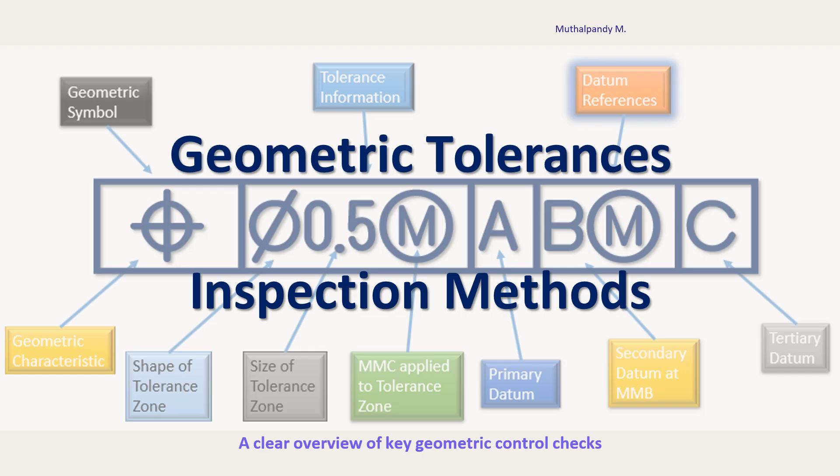Today we are going to learn about the measuring methods of geometric tolerances.

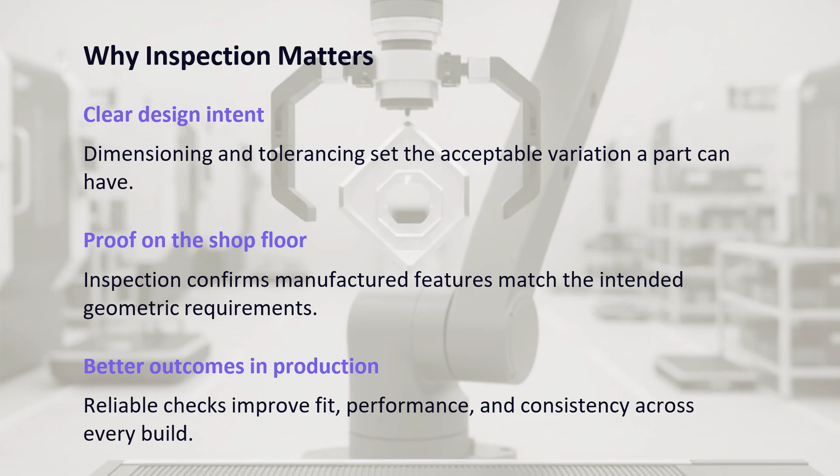Why is inspection very important? There is a clear design intent from dimension tolerancing mentioned in the drawings that sets the acceptable variation a part can have. To ensure that, we should have proof. That proof should come from inspection that confirms manufactured features match the intended geometric requirements. It improves better outcomes in production, so reliable checks improve fit, performance and consistency across every build.

The flatness variation - what do flatness checks confirm? It confirms a surface stays within a uniform, allowable flat zone. This prevents rocking, gaps, and uneven load transfer in service.

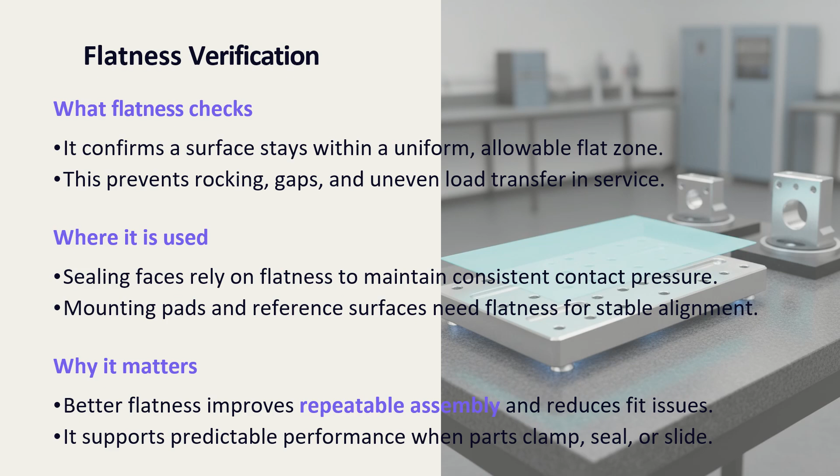Where it is used: sealing faces rely on flatness to maintain consistent contact pressure. Mounting pads and reference surfaces need flatness for stable alignment. Why it matters: better flatness improves repeatable assembly and reduces fit issues. It supports predictable performance when parts clamp, seal or slide.

Flatness inspection definition: the surface is flat within a tolerance zone consisting of two parallel planes 0.05 mm apart.

Inspection setup: place the part on a stable surface plate, representing the perfect plane. Support the part at all required points without rocking. Sweep the indicator across the entire surface. Total indicator reading (TIR) must be less than or equal to 0.05 mm.

So a flatness control frame example is given: the surface plate that is the perfect plane and tolerance zone for flatness is here, 0.05. The entire surface must lie between two parallel planes 0.05 mm apart.

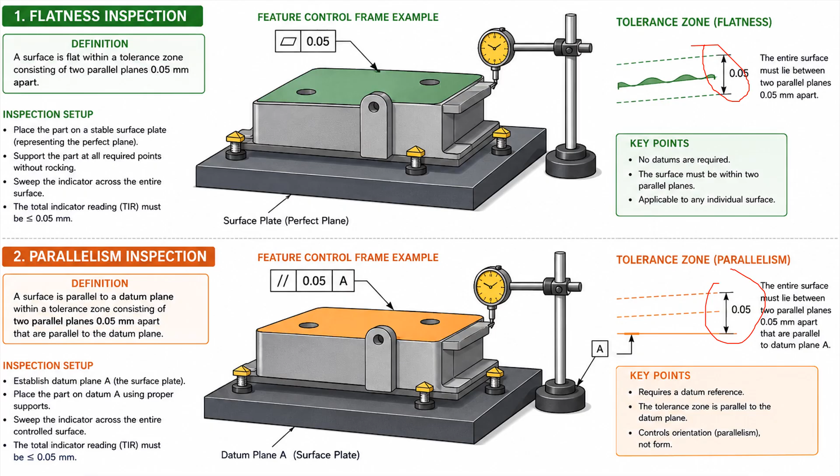Straightness check. What does straightness confirm? It verifies a line stays even without bows, waves, or local bends.

It focuses on shape along a length, not overall location. Where it is commonly applied: shafts and pins, where smooth rotation depends on a true axis; edges and guide surfaces, where sliding contact must remain stable.

Why it matters in assembly: it reduces binding, rocking, and uneven wear during rotation, motion, or seating. It improves fit and repeatability when parts must align consistently.

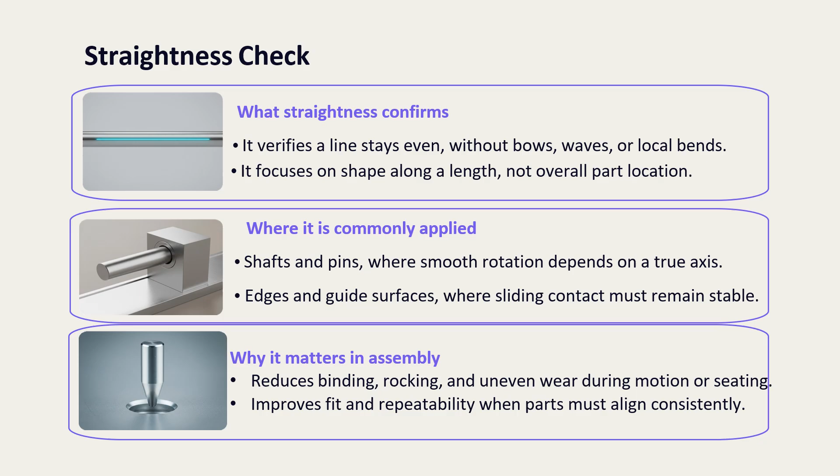Straightness inspection. The straightness definition as per ASME Y14.5: straightness is a form control that limits the variation of points along a line element or the median line of a feature so that they lie within a tolerance zone consisting of two parallel straight lines in 2D or two parallel planes in 3D. The symbol is a straight line for straightness.

The inspection setup: the part is mounted on a rotary table to allow 360-degree rotation. The dial indicator on a height gauge is set to a reference height. Rotate the table and move the gauge along the length of the part. The indicator records the variation from the straight reference line.

An example on a drawing: straightness of 0.05 mm tolerance means the median line of the cylindrical surface must lie within two parallel lines 0.05 mm apart along the entire length.

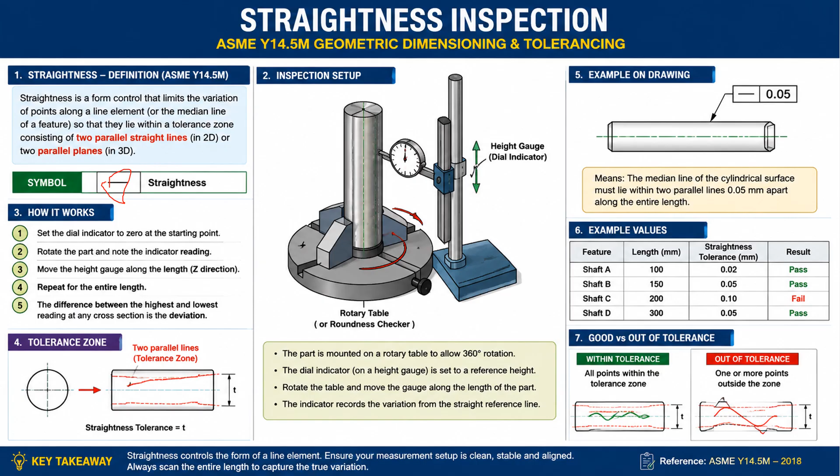And measuring circularity. What does circularity confirm? It checks how closely a feature's cross section matches a true circle. It focuses on shape quality, not the feature's location.

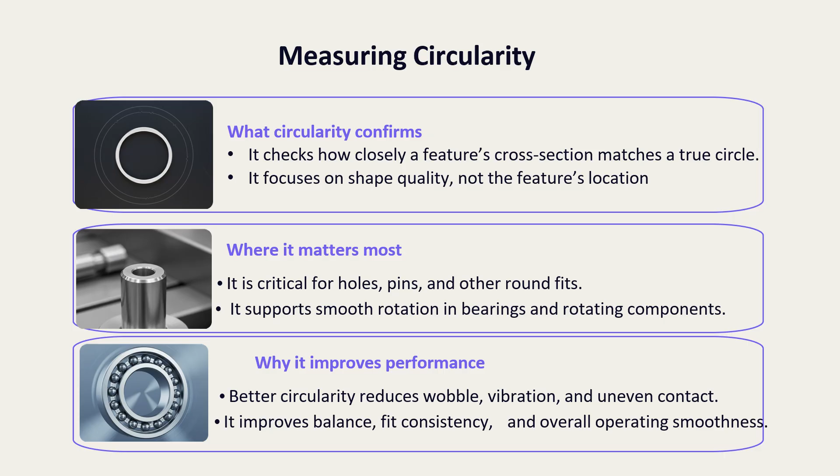Where it matters most: it is critical for holes, pins, and other round fits. It supports smooth rotation in bearings and rotating components. Why it improves performance: better circularity reduces wobble, vibration, and uneven contact. It improves balance, fit, consistency and overall operating smoothness.

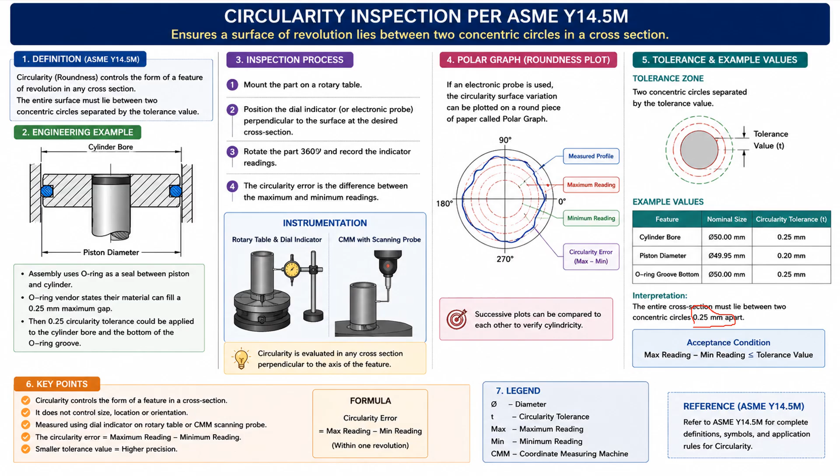Circularity versus cylindricity. Circularity is a 2D cross-section check. It confirms each slice stays close to a true circle, flagging out-of-round conditions that affect fit and smooth motion. Cylindricity is a full 3D surface check. It verifies the entire cylinder surface is uniformly controlled, combining roundness with straightness along the feature length. Why both matter together: they improve reliability for tight tolerance cylindrical parts.

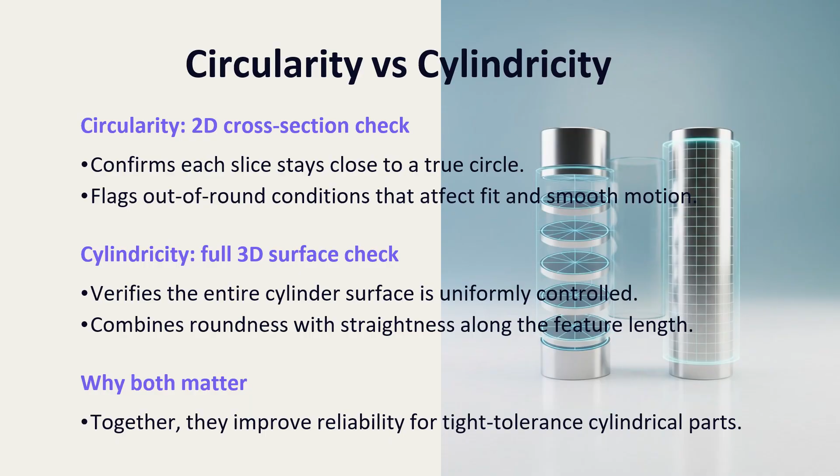Cylindricity inspection. Definition: cylindricity controls the form of a cylindrical surface. The entire surface must lie between two concentric cylinders separated by the tolerance value. The engineering example here shows a cylindricity of 0.05 mm. The feature control frame specifies the cylindricity tolerance of 0.05 mm. The entire cylindrical surface must lie within two concentric cylinders 0.05 mm apart.

The inspection process: mount the part between centers or a V-block fixture and support the free end. Align the part so that the indicator is perpendicular to the axis at the section to be checked. Rotate the part 360 degrees and record the maximum and minimum indicator readings. Move the indicator axially to cover the full length of the cylindrical surface and repeat.

The cylindricity error is equal to the maximum reading minus minimum reading at each cross section.

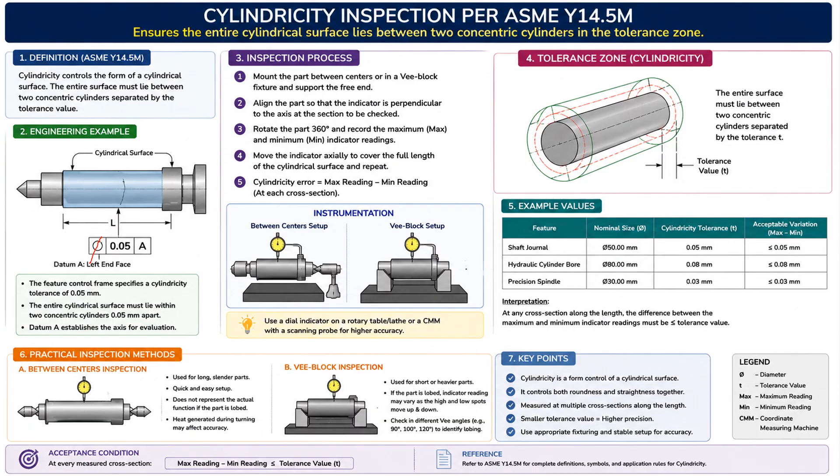Angularity control. So far we have done form checks; now we are going to check orientation controls. What angularity verifies: it confirms a feature sits at the specified angle to a reference, using reference datums. It applies to surfaces, edges, and axes that must be oriented. It matters most when angled faces drive fit, motion, or sealing contact, preventing misalignment that can cause uneven wear or binding. Practical benefit: consistent angles protect assembly, alignment, and functional performance.

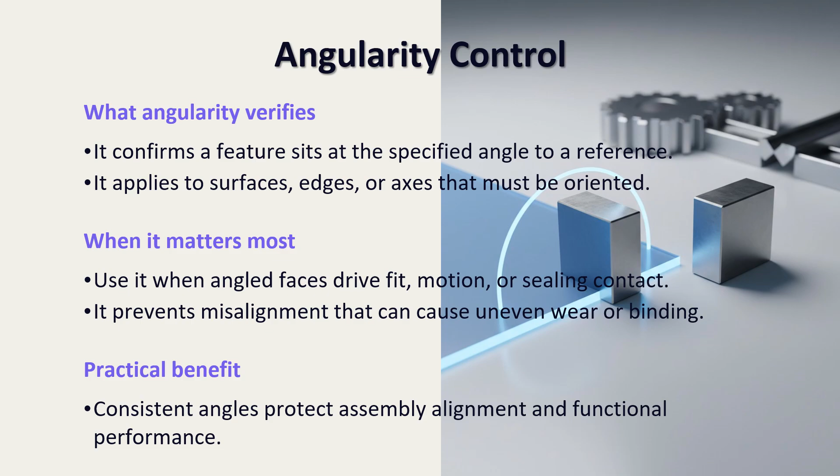Angularity tolerance inspection. Principle: a sine bar or sine plate is used to orient the controlled surface at the basic angle to the datum plane. The variation from the basic angle is measured by aligning a standard angle theta that we know, and the length of the sine plate that we know, then we calculate that height from the formula h = L sine theta.

Inspection procedure: set up the sine plate with gauge blocks to the basic angle theta, maybe 30, 45 degrees, whatever it is. Place the workpiece on the sine plate. Bring the indicator stylus in contact with the controlled surface. Traverse the indicator across the surface. The total indicator reading must be less than or equal to the specified tolerance.

The feature control frame states that the angularity of this feature should be less than or equal to 0.05 mm tolerance with reference to datum A. The surface must lie between two parallel planes 0.05 mm apart, inclined at the basic angle to the datum. The entire surface must lie within the two parallel planes, as shown here.

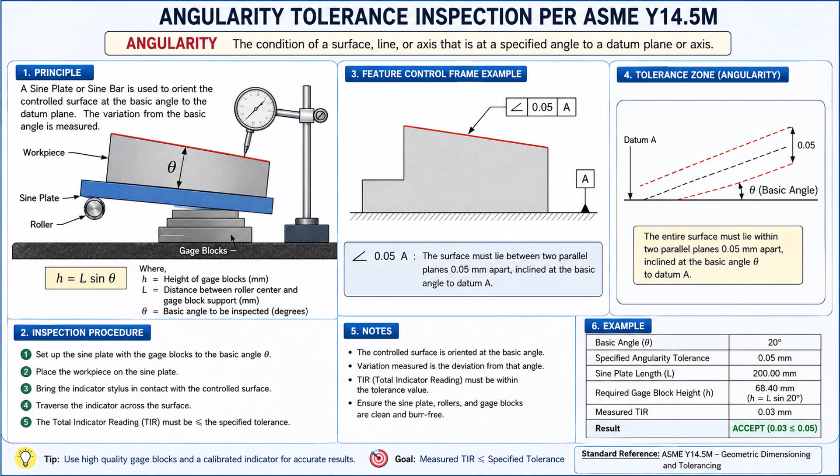Parallelism tolerance. Definition: parallelism controls the orientation of a feature so that it is parallel to a datum feature within a specified tolerance zone. Inspection setup: use a dial indicator perpendicular to the datum plane, move the indicator across the surface. Total indicator reading must be less than or equal to 0.05 mm. That's the feature control frame, meaning the entire surface must lie between two parallel planes 0.05 mm apart that are parallel to the datum plane.

Inspection procedure: place the part on the surface plate, that is datum A. Ensure the part is stable and fully supported. Position the indicator probe perpendicular to the feature surface and traverse the indicator across the entire surface. Record the total indicator reading. The total indicator reading must be less than or equal to the specified tolerance value to accept the part.

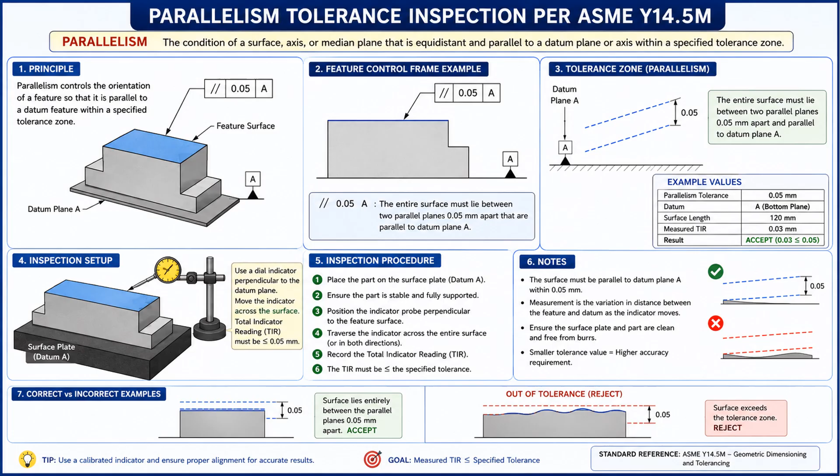Perpendicularity. The definition: perpendicularity controls the orientation of a feature so that the feature is at 90 degrees to a datum plane or axis within a specified tolerance zone.

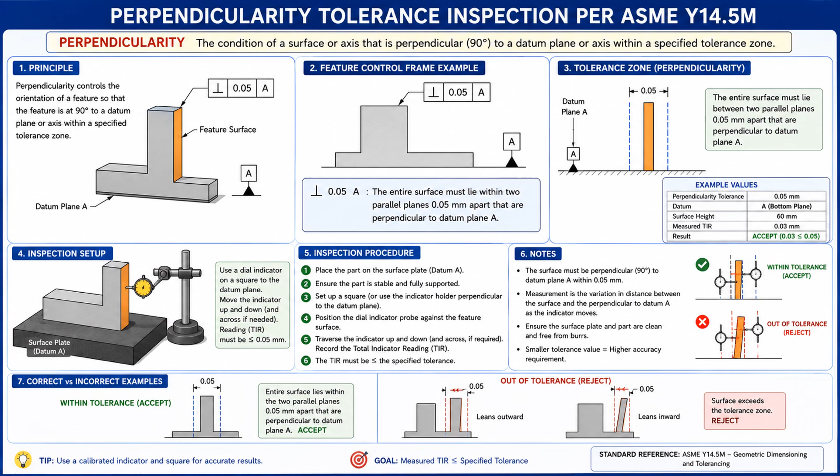What is the inspection procedure? Place the part on the surface datum plane and ensure the part is stable and fully supported. Set up a separate square or use the indicator holder perpendicular to the datum plane. Position the dial indicator probe against the feature surface. Traverse the indicator up and down, and across if required, and record the total indicator reading. The total indicator reading must be less than or equal to the specified tolerance value.

Locating true position. What does position control verify? It checks that a feature sits in the correct location from chosen datums, protecting design intent for alignment between mating parts. It is commonly applied to holes, slots, and repeated patterns on a part, helping ensure patterns match across parts during assembly.

Why does it improve assembly? Accurate position reduces rework by enabling first-time fit, and it lowers misalignment risk in fastened, pinned, and guided joints.

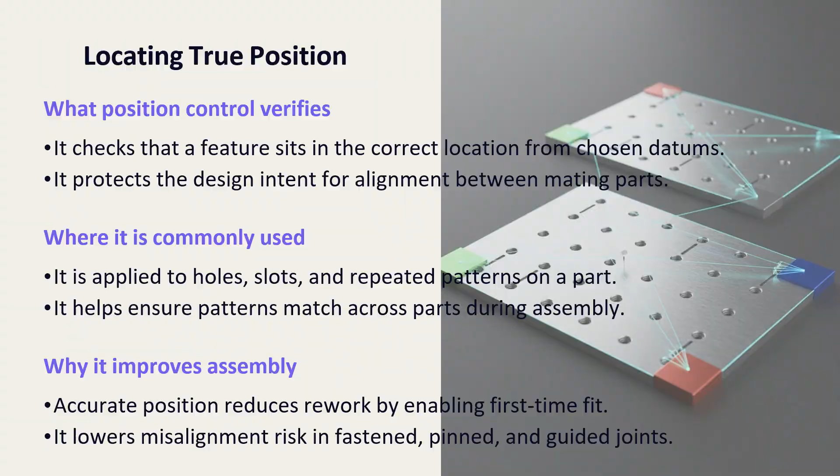What is the inspection procedure? Take the example of the position tolerance with datum reference datum C, datum A and B. These are three datums, and the position tolerance zone explains that each hole axis must lie within a cylindrical tolerance zone of 0.50 at maximum material condition relative to the datum frame A and B.

Inspection using CMM: a CMM probe probes each hole and calculates the position of the hole axis relative to datum A and B. If the hole is within the tolerance zone, the actual hole axis shows in green within the 0.5 mm tolerance zone. Since the actual axis is within the tolerance zone, the part is accepted.

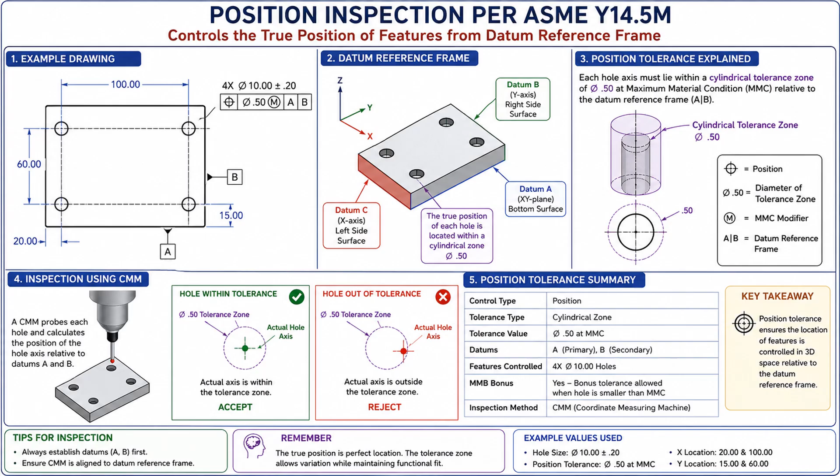Profile of line or profile of surface tolerance. Profile of line controls the form of a line element, edge, center line, or intersection. The actual line must lie within a tolerance zone of specified width. For example, the center line of the tapered surface must lie entirely within two parallel lines 0.05 mm apart, oriented to a true position by datum A.

Inspection process: establish the datum, select the method, measure the actual line, and analyze whether it falls within the tolerance zone. The result: if it is within the tolerance zone, the part passes inspection.

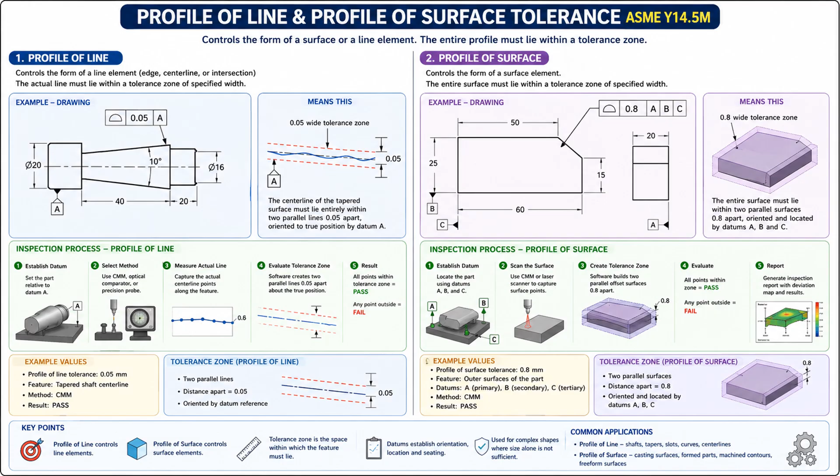Profile of a surface controls the form of a surface element. The entire surface must lie within a tolerance zone of specified width. The same process applies: you check and ensure the entire surface lies within the tolerance zone.

Assessing concentricity. What does concentricity verify? It confirms multiple circular features share the same center line or axis. In this picture, a bearing has many circular features of different diameters, but they share a common axis, keeping the feature centers consistent across related diameters.

When is it critical? Use it when one cylindrical surface must stay centered to another, typical for hubs, sleeves, and parts that rotate or locate precisely. Why it matters: better centering supports smoother rotation and reduced imbalance in motion, and improves alignment between mating parts during assembly and use.

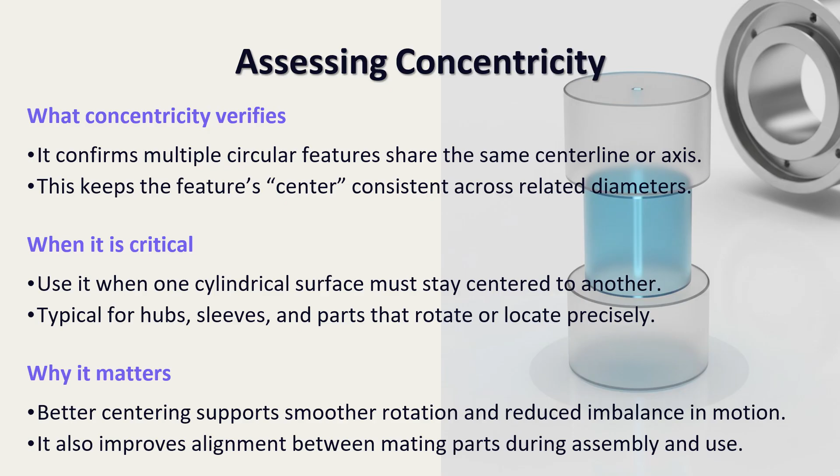Concentricity inspection concept: concentricity controls the relationship of the center of a feature of size to a datum axis. The center of the feature must lie within a cylindrical tolerance zone, coaxial with the datum axis. For example, a concentric tolerance of a cylindrical zone 0.03 mm with reference to datum A means the axis of the 20 dia feature must be within a cylindrical tolerance zone of 0.03.

This cylindrical tolerance zone must be concentric with the datum axis A. For the acceptance criteria and inspection setup: mount the part between centers using datum A as the rotating axis, place a dial indicator on the 20 dia surface feature, and rotate the part 360 degrees. The total indicator reading must be less than or equal to 0.03 mm.

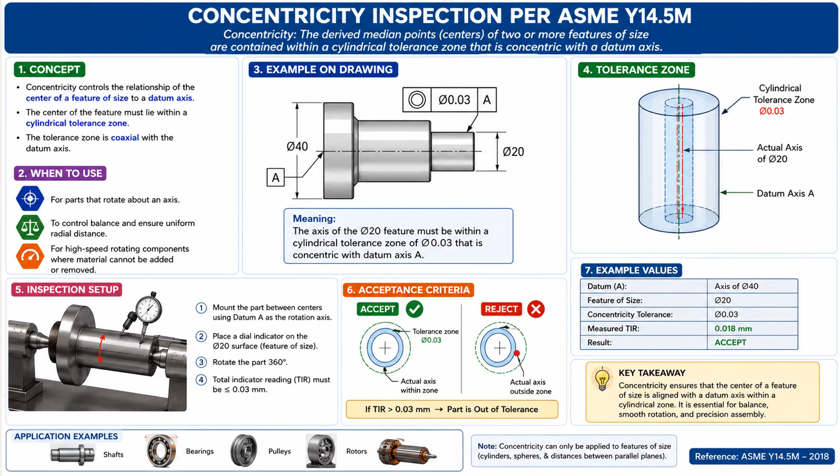Monitoring runout. What does runout check? Runout captures surface variation as the part rotates about a datum axis, revealing wobble or out-of-true motion that appears during rotation. It is commonly applied to rotating features that must run smooth and stable, useful when vibration, noise, or uneven contact must be minimized. Lower runout supports better rotational accuracy and consistent performance.

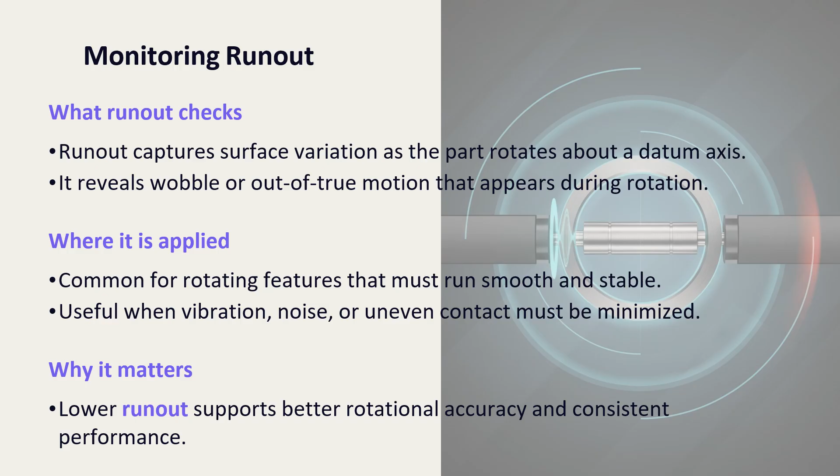Runout and total runout inspection. Runout means the variation of a surface as it rotates about a datum axis, applying to one circular element or surface. Total runout means the variation of the entire surface as it rotates about a datum axis, applying to all surfaces of the feature. The datum axis rotates and we check the runout; for total runout, it covers the entire surface.

For total runout, we check the cross-sectional area, meaning circularity, as well as straightness. Total runout is measured from one reference diameter to the other.

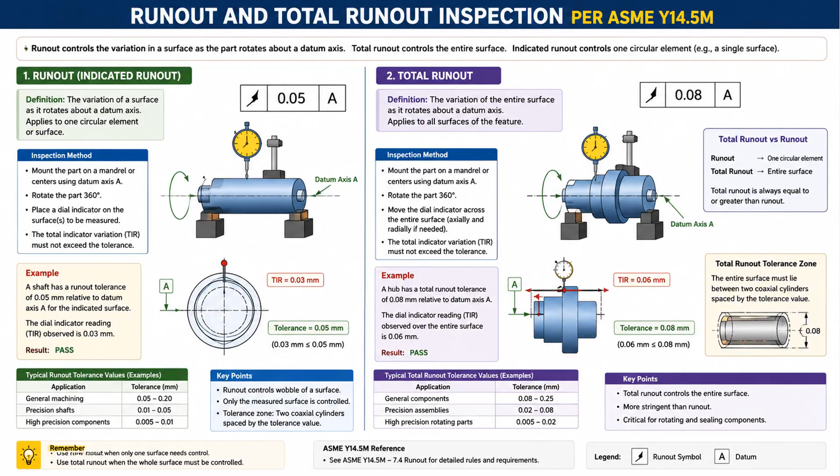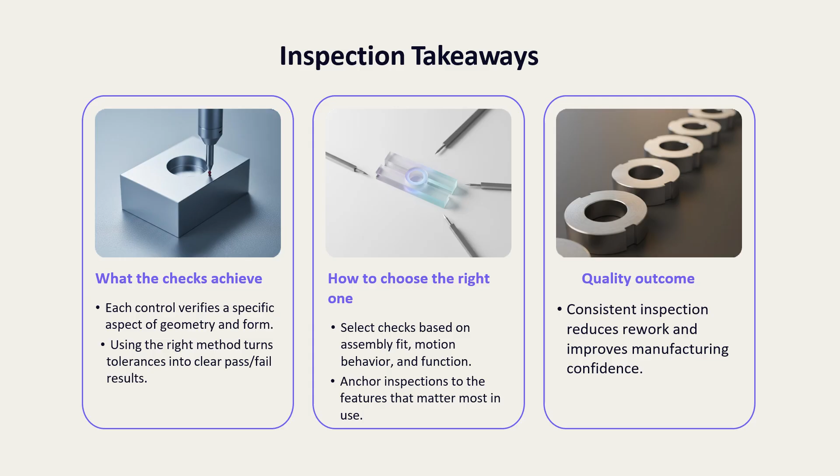Inspection takeaways: each control verifies a specific aspect of geometry and form. Using the right method turns tolerances into clear pass or fail results. To choose the right one, select checks based on assembly fit, motion, and behavior, anchoring inspection to the features that matter most in use. The quality outcome: consistent inspection reduces rework and improves manufacturing confidence.